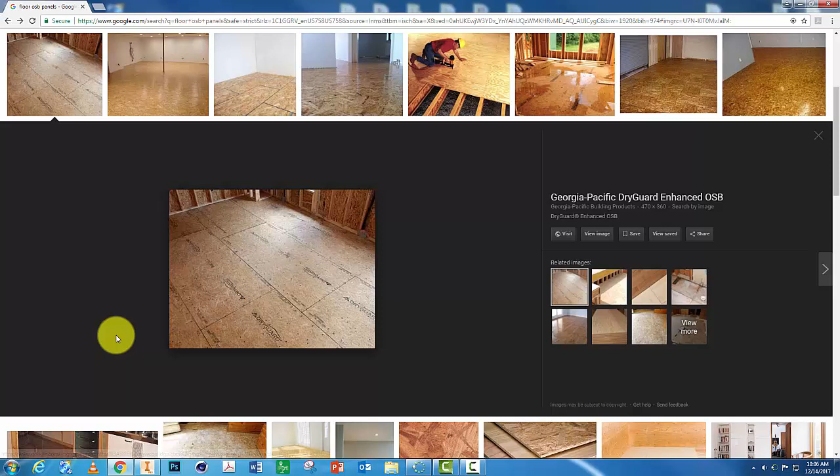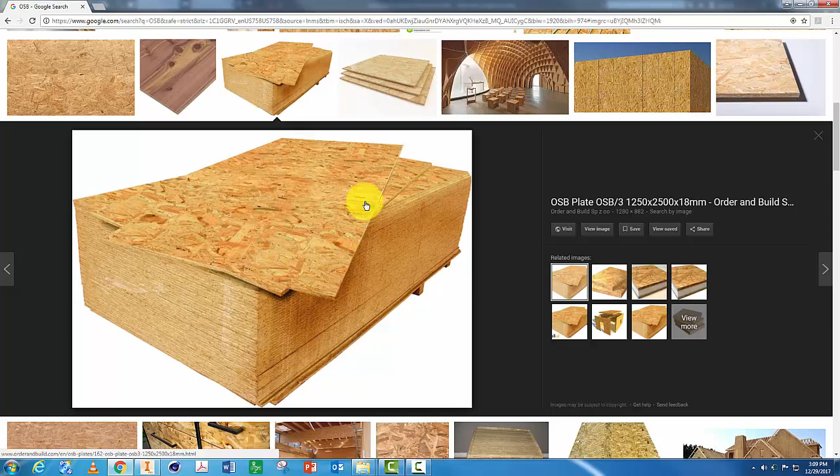Next, we'll add the main floor using oriented strand board panels. Oriented strand board comes in 4-foot by 8-foot sheets. In a real construction job, these panels would be cut strategically to go around our stair opening.

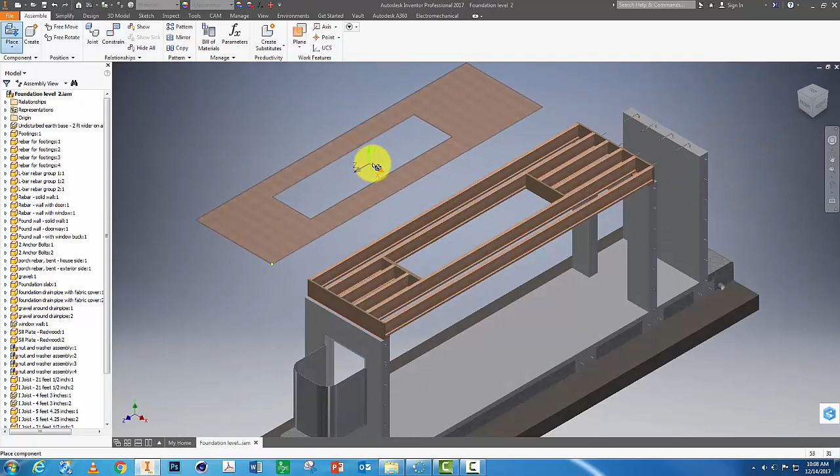Let's change our folder to main floor, and you'll see a main subfloor part. Subfloor is what we call those OSB panels. It goes below the finished floor, which would be carpet or hardwood flooring, tile, etc.

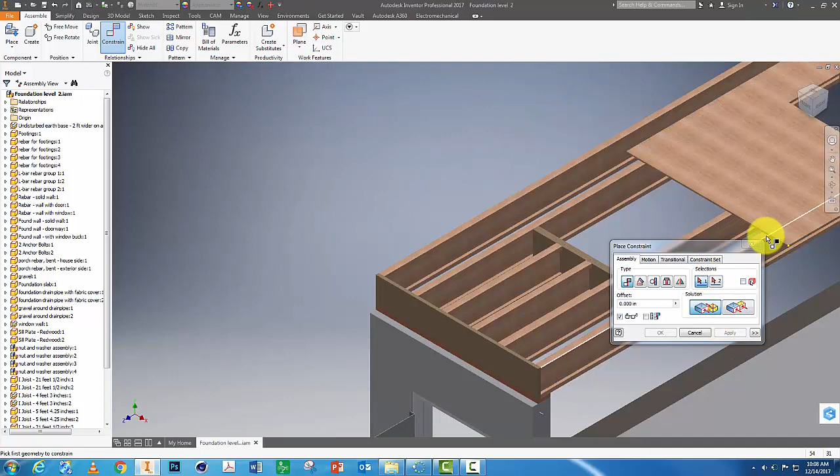I'm going to constrain the bottom of this to one of the I-joists, and I'm sure you know what to do from here, using the flush constraint. And now we have a main floor we could walk around on.

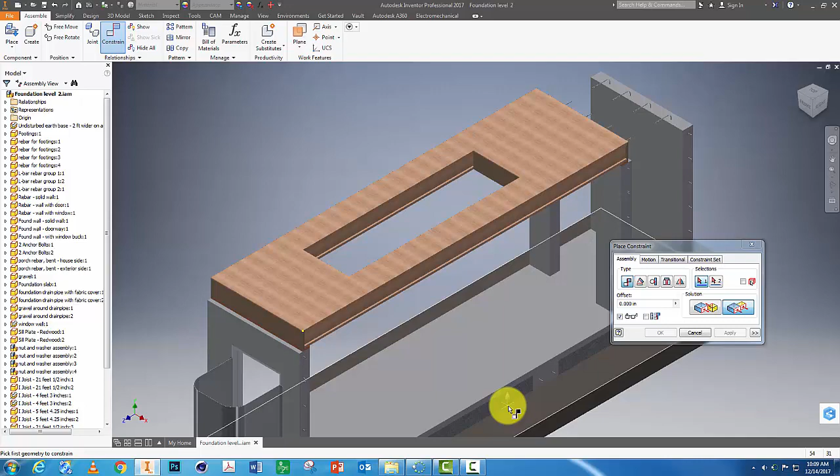Next is the stairs, but before we build those, let's save a copy of this. I'm going to go to File, Save, and then Save As, and name this Main Floor Ready for Stairs.

Now if we look in your folder, we have a backup copy. We'll leave foundation level 2 as our backup copy, and now we'll use this file from now on.

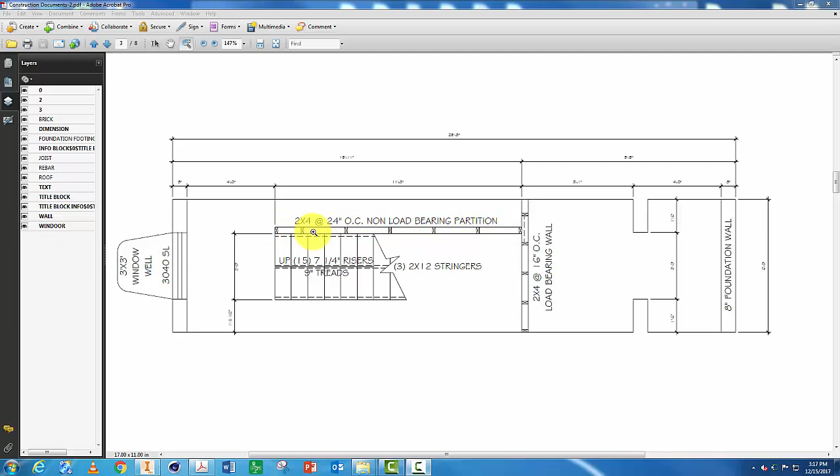Then there's a second wall here called a partition wall. Partition walls don't necessarily hold up weight, they are just a screen between rooms. This will also be built out of 2x4s. Notice that the studs in this wall are spaced 24 inches on center, and in this wall they're spaced 16 inches on center.

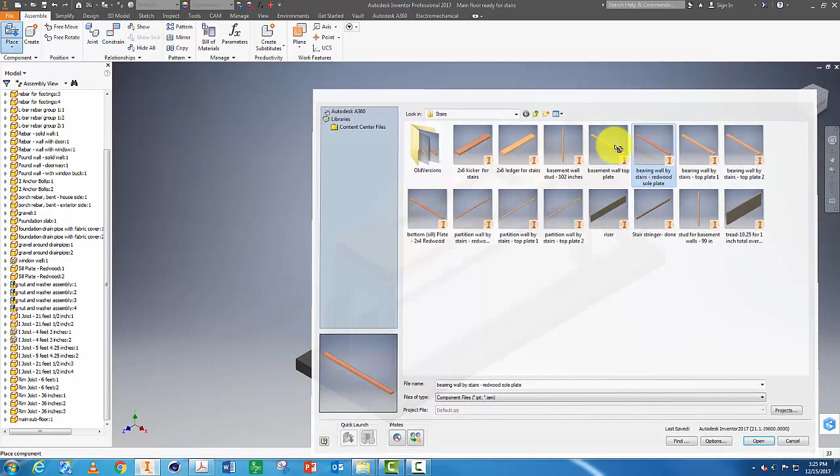We'll start with the basement walls by placing the bottom plates. Let's do one copy of bearing wall by stairs, redwood sole plate, and partition wall by stairs, redwood sole plate.

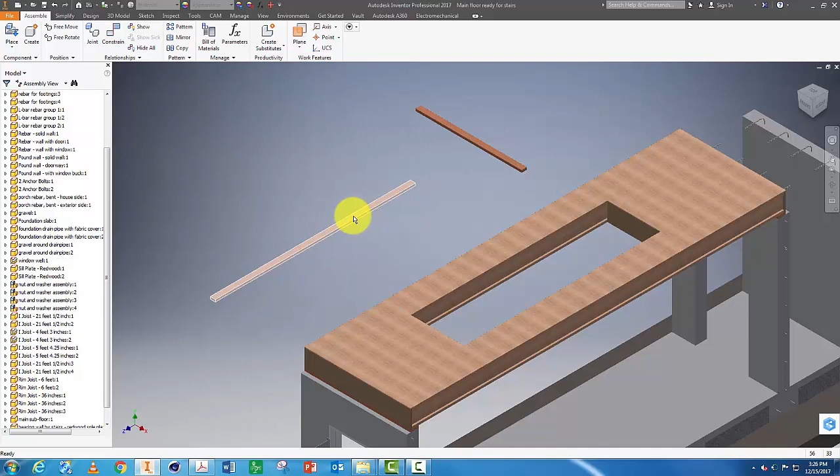First I'll constrain this one to the basement floor. Again, these need to be moisture resistant wood, redwood or pressure treated lumber, because they will be attached to a concrete floor. When bottom plates are attached to a floor, they're often called sole plates. When they're attached to a foundation and help seal your house to your foundation, they're called sill plates.

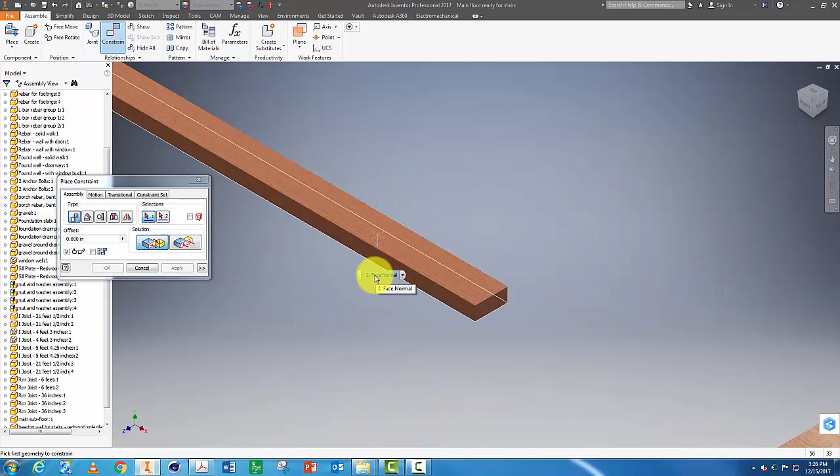I'll start with selecting the bottom of this plate and setting it here. Next, I'm going to use flush and line up the end with our model here.

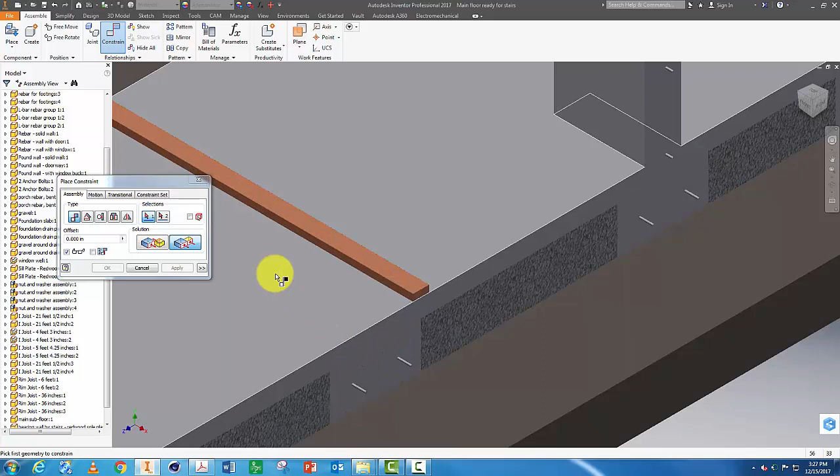This footing exists to support this extra weight that this wall is going to support, so we need to have it centered here. And it turns out that if you add one more constraint to this side and constrain it to the rim joist so that it's the same distance, now we're lined up on the footing and with that opening.

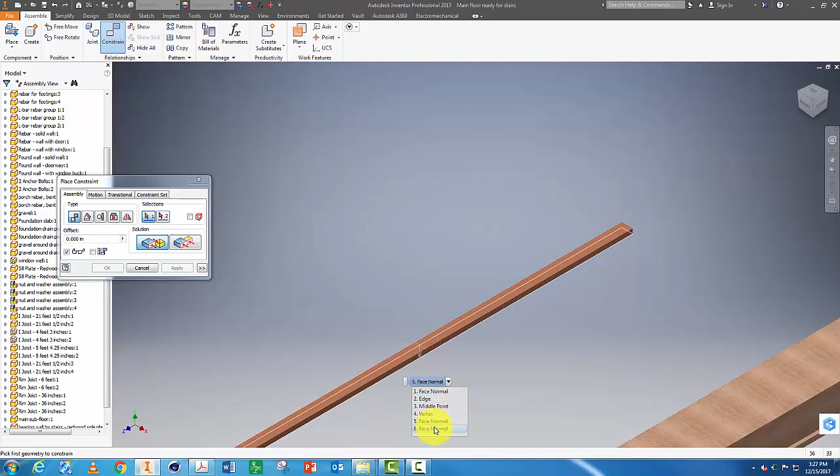Next, we'll place this sole plate, select the bottom edge, constrain it to the floor. For our second constraint, let's select the end and we'll use mate to this side of this plate.

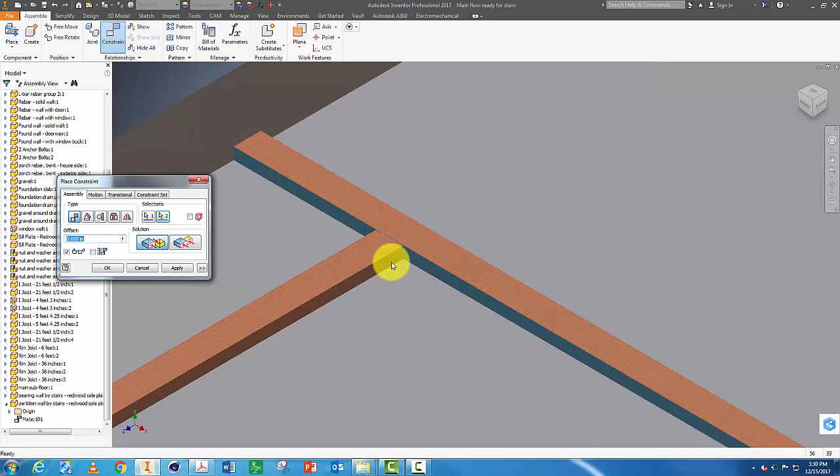And then to line it up with the opening above, let's go back to flush. Select this side and the side of this I-joist and apply that. So our plates are now in position.

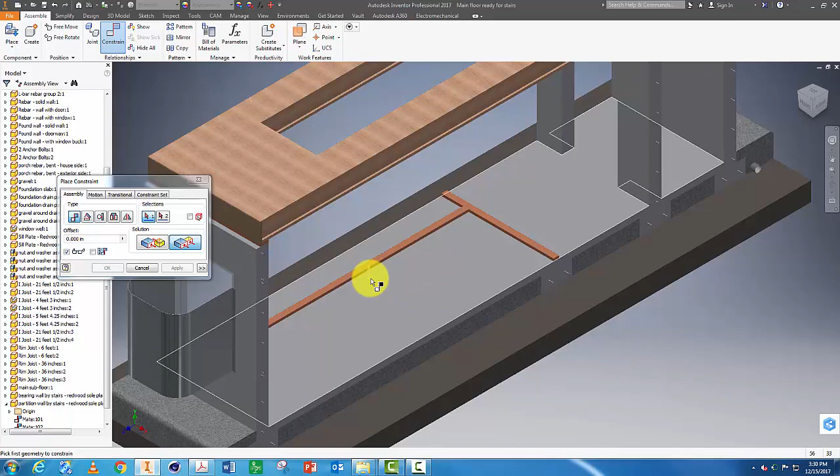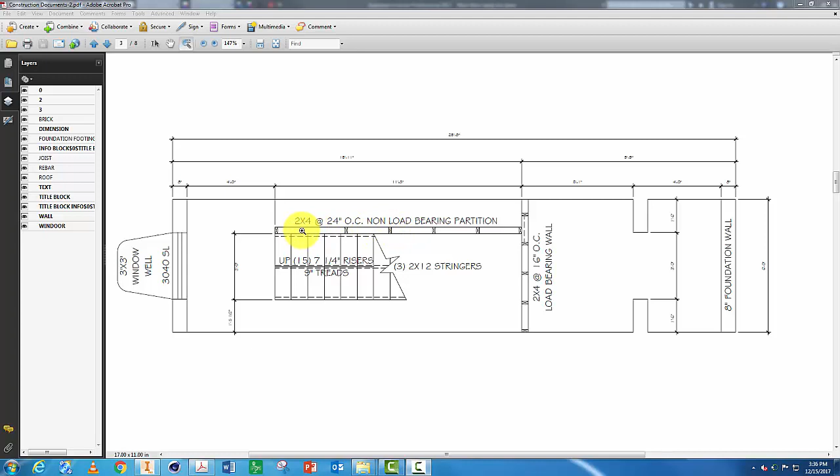Next we'll start adding some studs. Our load-bearing wall has 5 studs in it, plus some horizontal pieces that allow us to nail this wall to this wall. Load-bearing walls need to have a double top plate, 2 plates on top of the wall. Partition walls don't, they just need 1 plate. So we'll use slightly longer studs in this wall and 1 plate that ties in across the top into this wall.

Let's start by placing 5 copies of the 99-inch basement wall stud, and I think I'll put those over here. Might make my life a little easier. I'll start the first one.

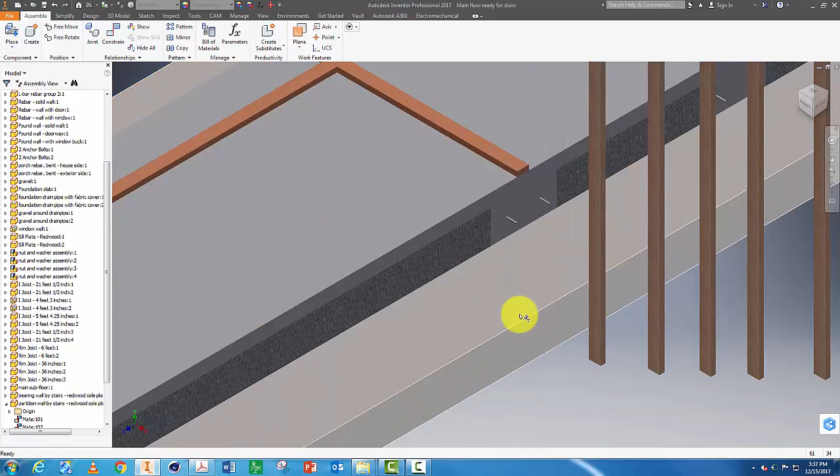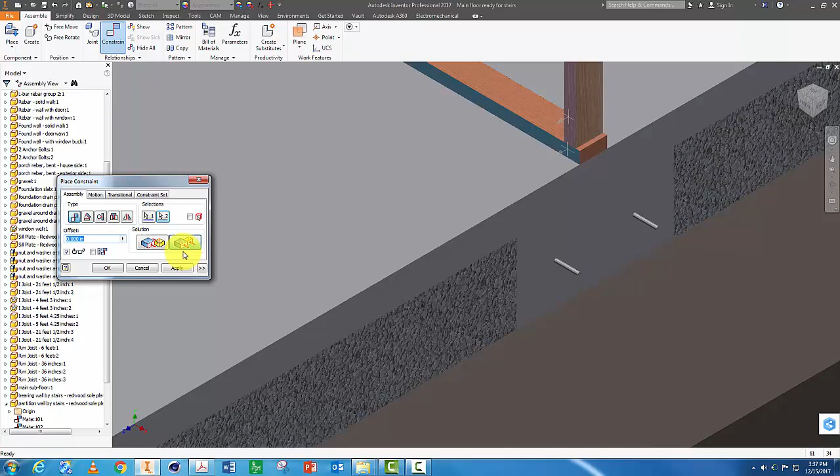Flush. And apply that, and 1 more flush constraint. The next stud needs to be spaced 16 inches on center.

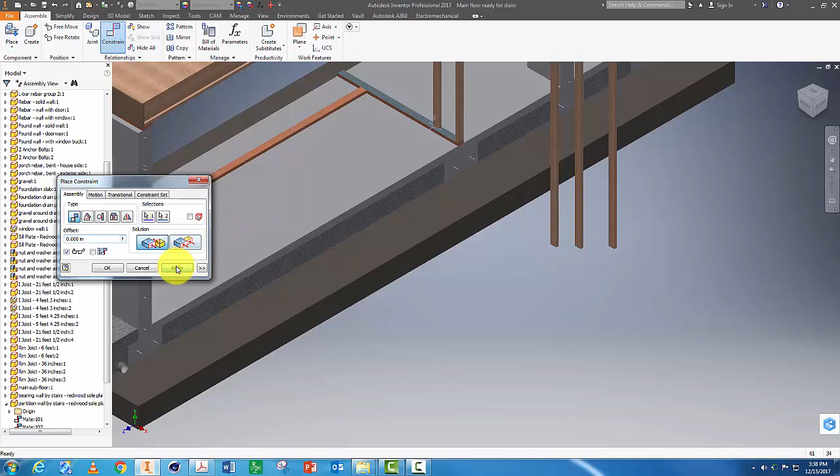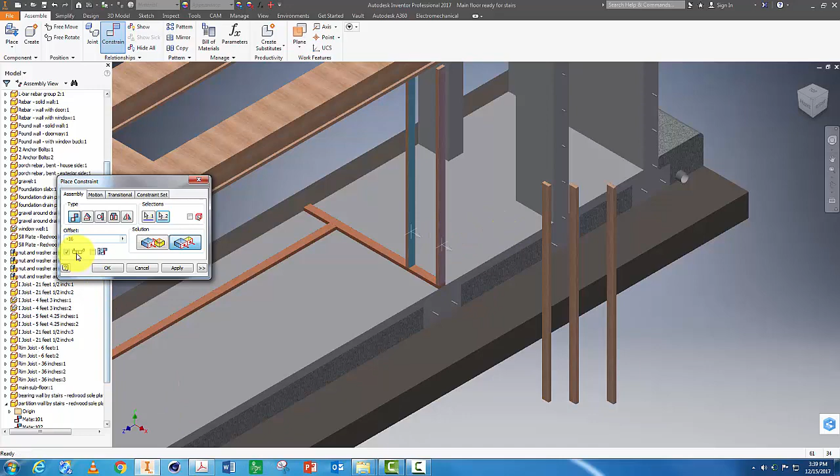And we can do that by selecting the first stud, on the flush constraint, the second, same face, and then setting that distance between those two to 16. Now if it goes the wrong way, just type -16, or I could have selected the order, first one, second one, the opposite way. When you've placed 5 studs that are 16 inches on center, you're ready to add nailer boards.

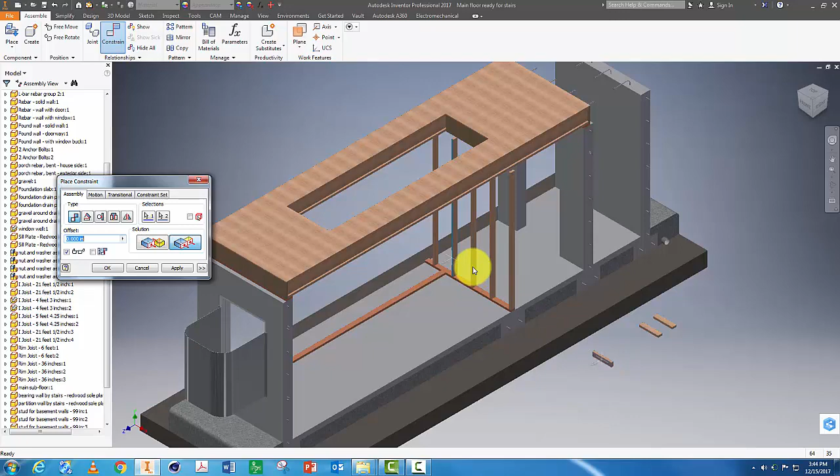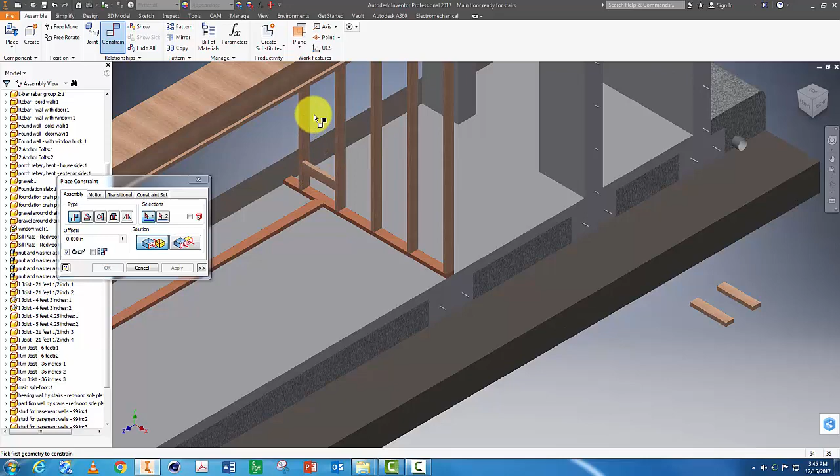Place 3 copies of this file, nailer boards 36 inch. I'll do the first one for you, show you where it goes. And then I'm going to place 2 more copies here and then adjust them by eye to be somewhat evenly spaced.

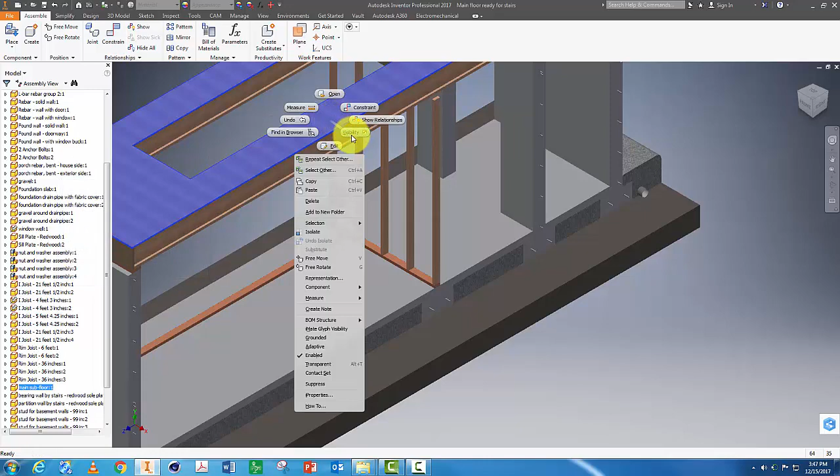Now I've got the 3 nailer boards in. I need to evenly space them. I've only put 2 constraints on each, so I'll be able to drag them into position. I'm going to right click on some of these objects, close the constraint box here, right click and turn off the visibility of everything that's in the way right now. That's plenty, and now I should be able to drag these.

Let's move these nailer boards so they're more evenly spaced. This is reminding me this is almost a 9-foot wall down here. I'm going to go ahead and add a 4th nailer board in here.

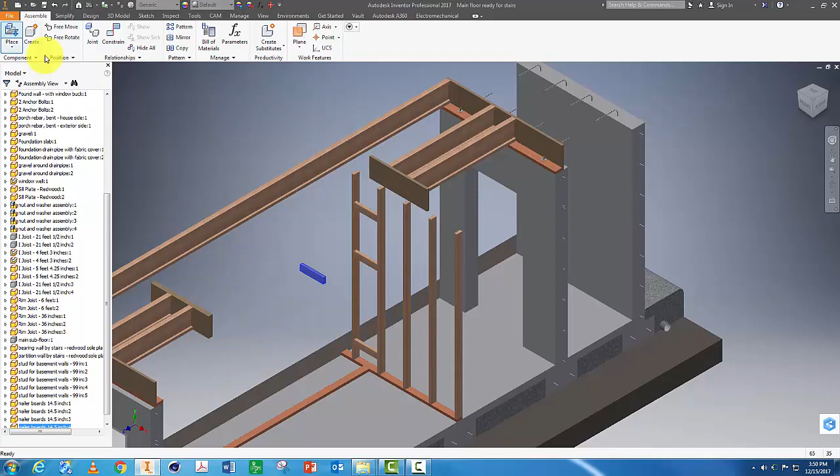Right click on it, choose copy, then right click and choose paste, and it puts a new copy in your file. That's an alternative to inserting it again or with the place command. It's already oriented the right way.

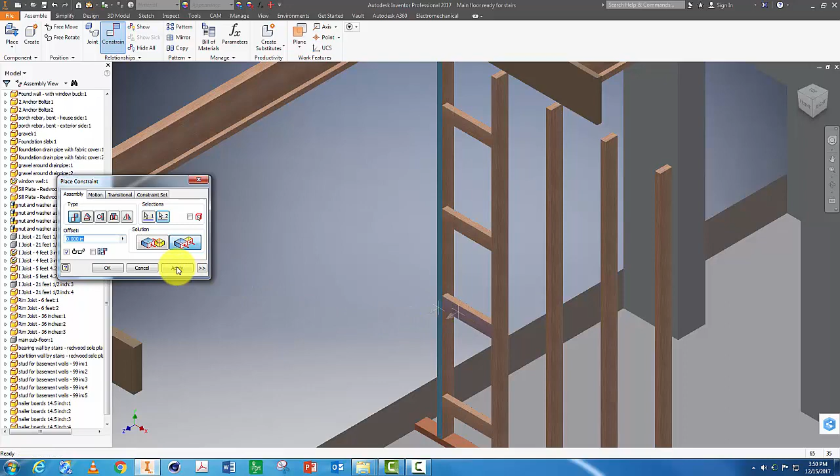And now I'm going to evenly space those 4 nailer boards a little bit more. That seems good right there.